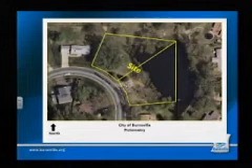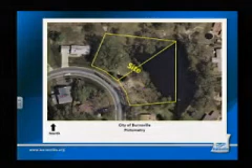This is a pictometry showing the location of the existing facility, at this location here. There is an access driveway, and the property slopes from the street down to the stormwater pond. This would be the vacant lot currently associated with this, and part of the site plan does include that northerly piece as well.

This slide gives a general idea — we are looking at this project, and it is in the Wetlands Environmental Overlay District. However, because this is a stormwater management pond, the purpose is to clean water and help control the amount of water that flows through the system and the time it takes. There are a number of different ponds associated with the system within this area of the city.

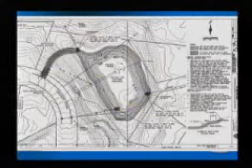For this particular one, the proposal includes not only rehabilitation of the lift station itself, but also clean out of the pond, so they can remove the materials that have accumulated over the years so it will begin to function as designed.

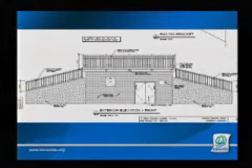What the proposal includes is primarily removing all of the facilities inside the building and replacing them, and those are the particulars that Jeff can speak to.

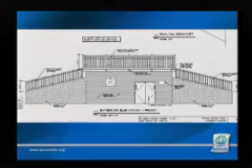In terms of the conditional use permit, we're looking at how this facility can be designed or improved to best fit within the residential character of the neighborhood. Considering it's an existing building, the plans have been designed to replace the fencing with a more decorative type, and the walls will be cleaned and painted brown, similar to what's out there now.

The fencing is also proposed to be a bronze type color, but a decorative fence, and I think more attractive than the other fencing that was involved. In addition to that, you'll note that there is a different style door that's being proposed here.

As you exit, or as you work at the site, most of the work is either done through lifting or climbing down through the top roof part of the structure, or actually walking down stairs and coming around and going in the current access door, which I believe is just a one-door facility.

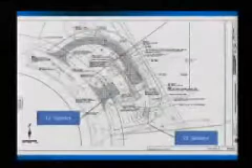With this project, there are going to be other improvements to make this more functional, usable, and more easily serviceable. And what we're looking at is currently there is a driveway that's over 40 feet wide.

Basically, as you look at the structure from the street, you see this big driveway, goes right to the building. What is proposed is to narrow this driveway in this location. And then as part of that area that used to have hard surface, that hard surface will be removed, there will be a new transformer pad that will be located here, and a new generator pad which will be located downhill on the northeast side of the structure.

This is the existing facility, which will have basically a new roof structure installed, a new flat roof structure, and then all of the pumps and components internal to that.

In addition, there will be a new access. This is the northerly of the two lots that the city owns. This access will be brought around, come down the hill, and there will be a parking area here, so that maintenance can get in and do work at the facility, instead of having to carry all the equipment downstairs, which they currently need to do from up here. They'll be able to service this much more readily with their vehicles and trucks for service needs.

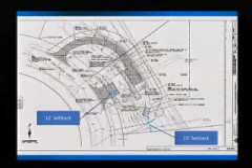There really isn't anything in this location at this point, and we have all hard surface here, but I think our staff can take a look at, as long as we aren't planting somewhere that's going to be flooded on a regular basis, whether there can be some additional landscaping located in those areas to address the concerns from the neighbors.

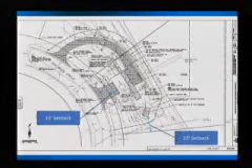Thank you, Ms. Garris. Any questions for Ms. Garris? Okay, any other member of the audience would like to come up? The public hearing is still open. Okay, not seeing any, we'll close the public hearing. Commissioners, over to you.

Commissioner Corey? Thank you, I would support this. I think the decorative structure on top is going to be an improvement from just the rail that's there. It seems with the planting of trees and the railing on top that they're trying to make it as pleasing as possible with essentially a cement structure that it is. And obviously it needs to be upgraded, and it's an essential part of it. So I'll support it. It seems like they're putting their best foot forward, attempting to integrate it into the neighborhood and make it as pleasing as it can be with what's there, while upgrading it at the same time.

In addition, staff is willing to work with neighbors to make sure their needs are met. Any other comments, questions?

Commissioner Bradrick? Sure, I would also be in support of this application. I do think I would appreciate if staff looked at the need or the possible use of some sort of gate to stop someone from driving down the road. It's a really quiet neighborhood, and it's really nice back in there, but someone could drive in, and it seems to me like the right thing to do, because today, as the homeowner said, you can park right off the street, but this is going to take you back a little ways.

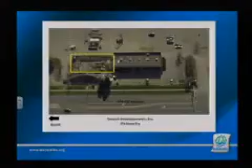Let me jump to this next image. Again, Men's Wearhouse sits right here. The 2001 approval brought the building down this direction. There was existing green space in this area. You'll see here the outline for the 4,000 square feet with the expansion.

The existing Men's Wearhouse is 5,500 square feet, so this is just less than double the existing facility. The applicant, in turn for the green space removed with the building addition, has removed parking stalls from the site so that we have no net increase in hard surface. Additional green space was added to satisfy those requirements. In total, 11 parking stalls were removed, and I'll get to the location of those in a second.

As you'll note in the report, the ordinance requires just over 1,000 parking stalls. The shopping center in total is at 1,393 stalls, so far exceeding the minimum requirements.

With PUDs, we talk about the benefits and the deviations. In this case, we see the benefit as the new tenant as a restaurant. Keeping Men's Wearhouse viable and expanding helps to keep the 42 corridor as a regional draw. It's also consistent with the previous PUDs to keep Burnsville Marketplace as a retail shopping center, as well as consistency with the comprehensive plan. There are no deviations. The applicant satisfied all of the performance standards for the ordinance.

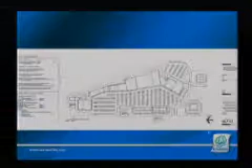To put things in perspective, I-35W runs right here, and Aldrich Avenue runs right here. Super Target sits right in this area. This is Men's Wearhouse. This is the addition. To pick up the additional green space that was consumed with the building addition, there were parking stalls right in this area that have been converted to green space. This exists as a nice green space. Existing trees, landscaping are there now. The applicant...

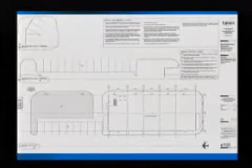Also made adjustments to actually add a parking stall back in here so that they could stay within their own parking criteria. Obviously, they have obligations to meet with their own tenants and satisfying sufficient parking. That was the existing layout.

This is the proposed layout. So the existing building ends here. This would be the 2,000 square feet allocated to Men's Wearhouse. On the far north end, this would be the 2,000 square feet allocated to Smashburger. The restaurant is proposing an outdoor patio in this area. It's got tables and chairs for 20 people. That is within the ordinance.

There are no special requirements, special approvals through the Planning Commission for that. As I indicated, the applicant satisfies the performance criteria. The parking is satisfied. The building addition will replicate what is out there. The same brick is being used, the same brick detail. There's soldier course along the back of the building and the base.

This is what you'll see from Aldrich Avenue. The outdoor seating patio sits on this end. There is a trash enclosure proposed. Obviously, with the restaurant, you've got additional trash, recycling, grease containment. All of that is enclosed within the trash enclosure. It's on the north end of the building. It's got doors, roof, brick walls, so it will look like the rest of the building and does satisfy the ordinance. The applicant also provided...

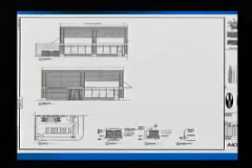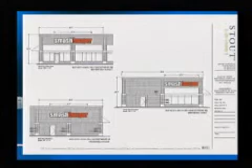Last but not least, Commissioners, the applicant is well within their signage requirements. There are no freestanding sign requests with this project. Men's Wearhouse will utilize their existing signage on the building. Smashburger is proposing 3 wall signs on the east, west, and north elevations of the building. They are proposing in total less than 240 square feet, and they're allocated up to 430 square feet of signage, so well within their allotment.

Staff is not recommending any conditions with this. It satisfies the ordinance as presented. Nathaniel Shea with Tanek Architects, they are the designer on the project. Mr. Shea is here to represent the property owner. I believe we can answer any questions the Commission may have. It is a public hearing, and I'll stand for any questions.

Thank you, Mr. Slania, for your presentation. Commissioners? Questions to Mr. Slania?

I guess, Commissioner Benke? Chris, I was there this afternoon about 5 o'clock, and I came out of the parking lot on the south end of Men's Wearhouse, and I almost got hit. And I'm a little concerned with the extra traffic Smashburger is going to bring there, considering that right now none of Men's Wearhouse parking is being utilized because of the construction. Everybody's parking on the Office Max side.

I presume Smashburger expects to bring quite a few people in here, a lot of traffic, and I'm a little concerned with how tight that area is currently, especially with the exit to Aldrich immediately south of here. Mr. Chair, Commissioners, staff did look at the traffic. It is intended to be a regional draw, so it will have traffic implications, especially their first few weeks or months open. Staff feels long-term it will not significantly depreciate the traffic volumes or deter traffic in the area. It was not a significant concern from a staff perspective.

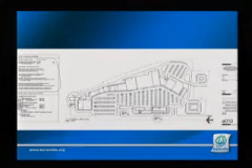There is two-way traffic on all directions of the two buildings. There could be additional landscaping or screening and the patio moved farther away from the building. It would eliminate this drive between the two. This exists as green space now, and this is the Leeann Chin Restaurant. So there are possibilities, none of them easy or cheap. It would require significant changes to the circulation.

What's the capacity of the patio? 20 seats. Any other questions? Okay, Commissioner Tahiri?

Thank you, Mr. Chair. Chris, you mentioned the parapet height being increased to accommodate the view to rooftop equipment. Does that match the existing parapet? It does, I'm glad you mentioned that. It will be the same height as the existing. As you've driven by the site, most of the rooftop units are screened by that existing parapet. Staff's comfortable maintaining that same height, so aesthetically, long-term it will not look like an addition to the building, but rather that it was originally designed this size.

Follow up on that, Chris, just for me to clarify - the brick wraps around the building 100%, right? Correct, there is no concrete block or... Correct, masonry, 100% as the building exists now. Okay, thank you. Any other questions?

Thank you, Mr. Slania. This item requires a public hearing, and I will now open the public hearing. If anyone would like to come up and give their views to the commission, we welcome you. Anyone? Seeing none, then we close the public hearing.